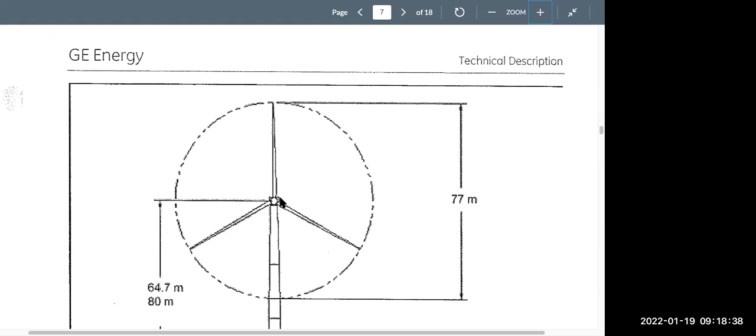And that just simply means the difference between the hub height and the diameter. All right, let's move on to the next section. We know that they're 80 meters, which is roughly 250, 240 feet tall, is how high up you are when you're sitting on top of this thing. And they get bigger, they can go to 100 meters. Usually around 100 meters is about as big as they go when they're on land.

The next section says the machine employs active yaw control, designed to steer the machine with respect to the wind, active pitch control, and generator power electronic converter systems from a speed variable drivetrain concept, designed to produce the nominal 60 hertz at 575 volts. Boy, that's a lot of stuff right there.

So what you want to do in your homework, on number 4, it says the wind turbine employs active yaw control. What's the difference between active and passive things? Does anybody know? We're talking about like a wind turbine. I'm trying to get you guys a chance to hop on in there and just shoot from the hip, it's okay. I believe it means... go ahead. With yaw control, active is like the turbine itself is turning its nacelle, and passive is the wind doing it. Yeah, active. Anybody else want to add to that?

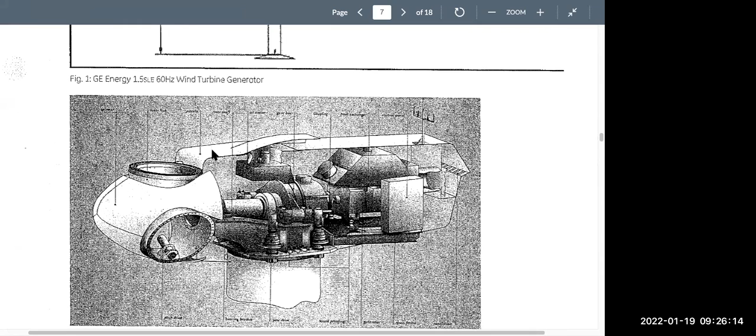This picture's terrible, we don't have any questions that come out of this picture, so we'll look at a better picture. Just kind of ignore that one there, can't read it anyway.

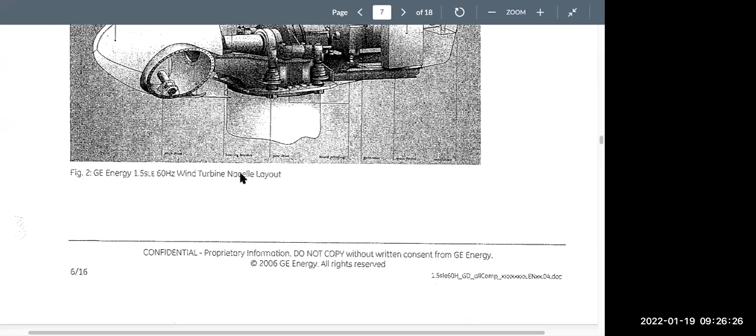Okay, so we know the rotor diameter is 77 meters. They give you a fancy number called a swept area, which we'll do some calculations on what that means later in the year.

The next question is, how many revolutions per minute is a rotor designed to spin? So what are they calling the rotor? Does anybody know? The rotor, yes, the middle part of it. It's basically the thing that when the blades spin, it spins the rotor that's in the middle of the wind turbine. Yes, you're right.

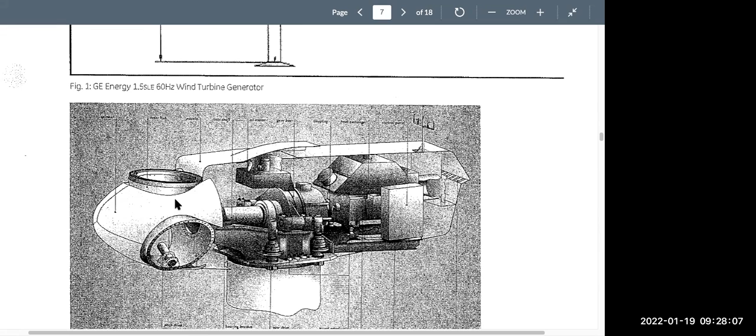So that's called the hub or rotor hub. The rotor is more or less the blades and the hub, like the propeller in an airplane and the nose cone, that type of thing. We call this the hub, and we call these the airfoils or blades. Hub plus blades together is the whole rotor. This whole thing right here is the nacelle. This part right here is also called the hub, and inside that hub we can see a little pitch motor.

So it's designed to operate between 10 to 20 RPMs per minute. When we look at these wind turbines, they're spinning and they look like they're going really slow, but they're going as fast as they're supposed to go. Those blades are moving depending on the speed of the wind, and the blade tips will be hitting around 150 miles an hour. So they're moving fast.

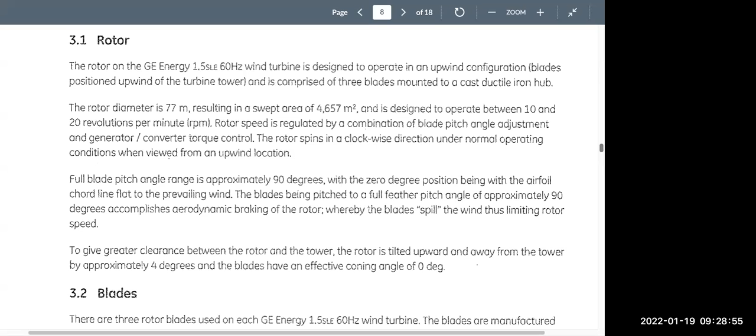The next question is, what is full blade pitch angle? 90 degrees, right? So what we need to answer on our blades, there's a couple terminologies. Full blade pitch angle is approximately 90 degrees. And then there's an angle called the 0 degree position for your blades. So think about a blade being able to spin in a circle. Where is 0? Where is 90?

The blade isn't going to necessarily spin in an entire circle, it's going to spin up to its limits. Each one of these blades will have a limit switch that allows it to spin roughly 90 degrees. So full blade pitch angle is 90. And 0 degrees is when the airfoil or blade is flat to the wind, or flat to the prevailing wind. Prevailing wind is just where the wind is coming from.

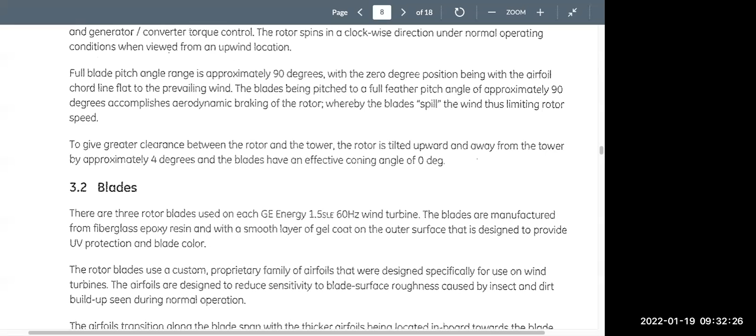All right, let's move down. What are the blades manufactured from? Fiberglass - yep, that's an easy answer. Fiberglass epoxy resin, and we've all seen that when we have one of those blades. It's actually a Vestas blade, but it has fiberglass embedded into balsa wood with an epoxy resin and a gel coat.

And what does the gel coat do? It says right there, blade color, UV protection. We're trying to keep the blade protected, and the gel coat tries to keep everything as aerodynamic as possible.

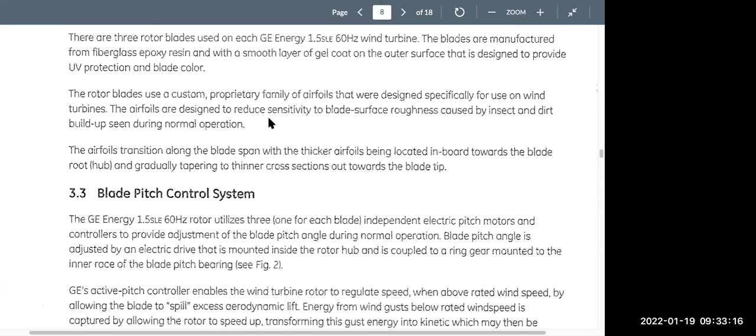All right, let's move on now to question 14. I'm on question 14. Does the GE 1.5 use hydraulic or electric pitch motors?

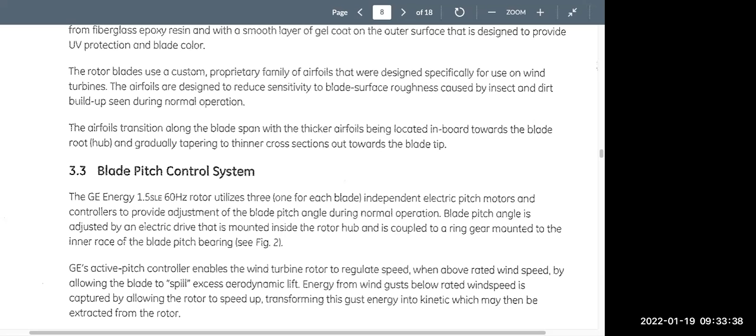So when we read this, we're trying to understand that. Electric, yep, electric. So we know that there is a motor that's going to spin the blade one direction or the other, and it's either going to be done by a hydraulic system or an electric system.

So now we know that the GEs are using electric. Vestas tends to use hydraulic. Have you been in a turbine that's using electric blade pitch, Edwin? No, everything is hydraulic, everything, they're just sticking with hydraulic. I wondered if they'd go back to it. I mean, hydraulic works, it's just messy. But it works. Yeah, that's why they have messy towers.

Let's move on to question number 15. So question number 15 is saying, what protection do the blades and wind turbines have if grid power goes down and the turbine loses power? How does the turbine protect itself? Like if your house loses the grid, all the power's out. What is inside this turbine that's going to keep it to where it can keep running? Does anybody know?

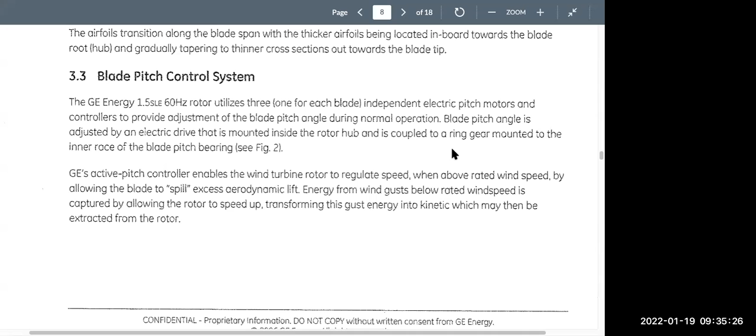Is it like, what's it called? Blade brake or something that cuts off the generator from the blades?

Yeah, well what they do is they use those batteries. So your answer there would be: each blade has a battery backup blade pitch system. So what that's going to do is use the batteries to feather the blades, or to turn the turbine out of the wind so it's not spinning anymore. We don't want the blades to catch the wind because the grid's down and we're not making any power. We want to shut our turbine down. So that's where that's at.

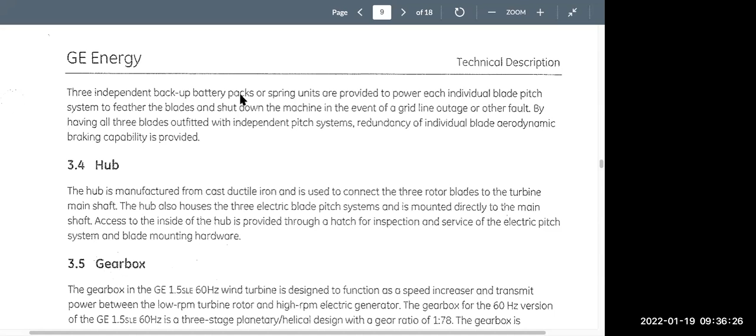Let's see, the next section is just talking about the hub. We already talked about the hub. The hub was that centerpiece of the wind turbine, the nose cone where all the blades are. That's where we have the pitch system and control systems. We'll learn more about that later. Each one of these areas will go into great detail, as much as I can go into anyway, throughout the year.

So the next section we're looking at is the gearbox in the GEs. It says the gearbox in the 1.5, 60 hertz wind turbine is designed to function as a speed increaser and transmit power between the low RPM rotor. Remember, the rotor and the blades are only going 10 to 20 RPMs, and the high RPM electric generator is running at a much faster speed, more like 1400 RPMs. But it's the gearbox that allows this to happen.

So the gearbox for this turbine, 60 hertz, is a 3-stage planetary helical design with a gear ratio of 1:78. So what you want to write down for question number 16 is: the GE 1.5 has a 3-stage planetary helical design gearbox with a ratio of 1:78.

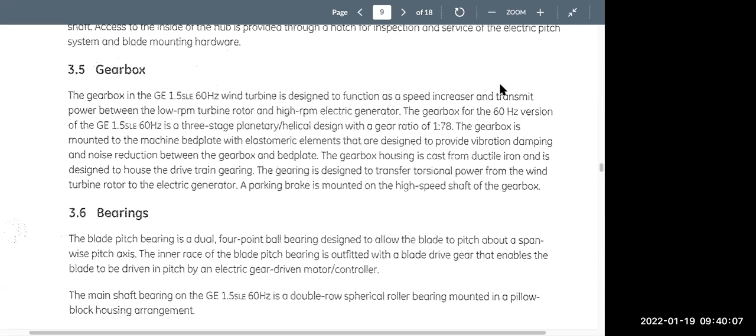Okay, so let's talk about bearings. Bearings are a really big, important part of wind turbines, because they are really taking on an enormous amount of axial and radial loading, meaning that the wind's pushing on these blades from different angles, and that's forcing your bearing to wear out, right?

So we're just going to write down - in the last class, our 101 class, we learned about different types of bearings, and we had a very small introduction. So if you're like, I don't know anything about bearings, don't worry about it. Just try to learn them as you go, because we're not going to focus heavily - we're just focusing at this point in time on what is in this GE.

So number 17 says the blade pitch bearing is a dual 4-point ball bearing. And the reason I point that out is because as a tech, you're going to have to learn the differences between different types of bearings - is it a roller bearing, is it a spherical double row, blah blah blah. There's several different types of bearings. You only need to know what kind of bearing is in the turbine you're working on, because if it comes time for you to work on it or grease it or replace it, that's where it comes into play. Okay, then we have a main shaft bearing.

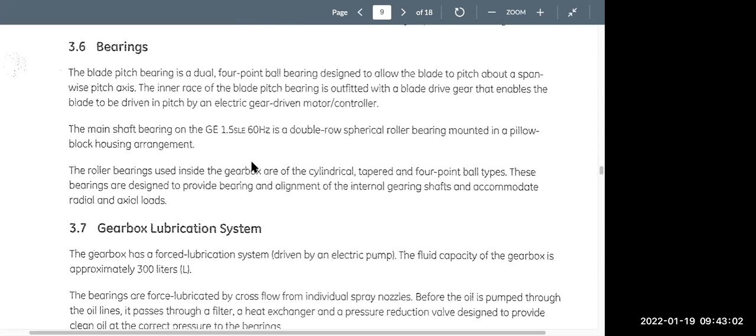The next section has us moving on to the gearbox. Let's learn a little bit more about the gearbox lubrication system. Some of you guys don't know the information, but it's good to know. You've had these questions before.

Let's back up here, hold on. We missed a question. We're on question number 19, the gearbox bearing, I'm sorry.

The gearbox uses roller bearings, and there's different ones. So these are 3 different types of bearings you're going to write down: cylindrical, tapered, and 4-point ball type. Do you have to remember all this stuff? No, don't freak out like, I can't remember all this stuff. No, what you're doing is just becoming familiar with what this stuff is so we can have a conversation about them, just like we already are. Tyron and I have had a couple conversations about the gearbox. He was telling me about a ring gear and a sun gear and things like that you've already learned. That shows you that you're learning, that shows you you're getting ready to go into the next step.

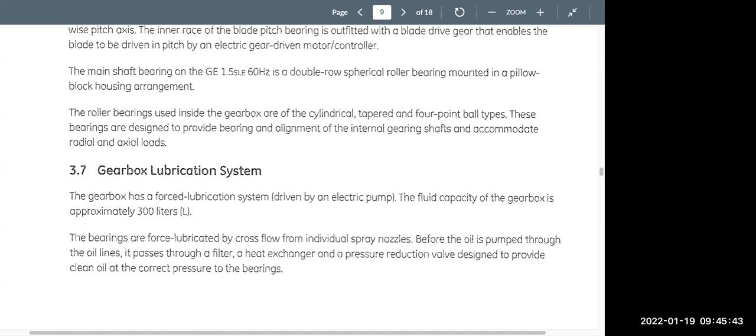Okay, it starts to get a little bit easier. We start to pick up a little speed here on some of these questions. A lot of the meat and potatoes of this brochure we kind of talked about already.

So let's talk about the lubrication system. The fluid capacity of the gearbox is 300 liters. That's how much oil we've got to put inside that, and that's oil that's sprayed inside this gearbox as it moves around. So we'll look at the drivetrain specifically in this class, and we'll see that there is a filter, there's a heat exchanger, there's different things within this gearbox that are trying to keep the temperatures regulated, because the viscosity of the oil matters.

Is it too thick? Is it too thin? And also, does it have metal shavings in the oil? Do we have a problem with our teeth? Those are some of the maintenance things that we'll be looking for.

Okay, so that would have been the answer to question number 20. So before the oil is pumped through the oil lines, it passes through a filter, a heat exchanger, and a pressure reduction valve, which helps clean the oil and correct the pressure.

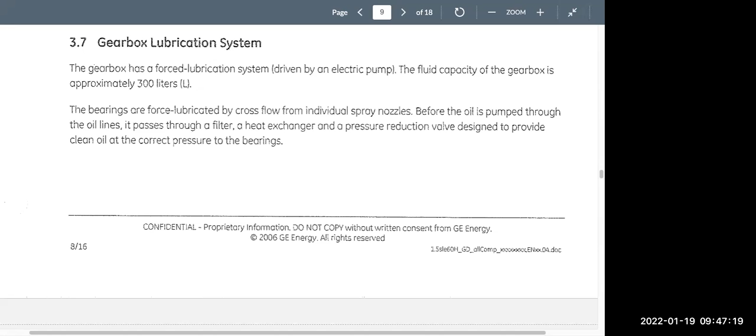At this point, we should be ready for section 3.8. So if you want to write that down in your notes, I'm going to be starting over with question number 1 under section 3.8.

So what acts as the main braking system? Blades. Yeah, the blades. We have other brakes that can be incorporated, but when we talk about the main braking system, the main braking system is going to be those active pitch blades that take it out of the wind. So number 2, braking under normal conditions is accomplished simply by feathering. So the answer to number 2 is feathering, feathering the blades out of the wind. That's normal braking.

Number 3, we should know that answer already. Can the blades be feathered out of the wind if the turbine loses power due to grid line power loss? There's a couple typos maybe in there. If so, explain how. Well, we discussed that already, right?

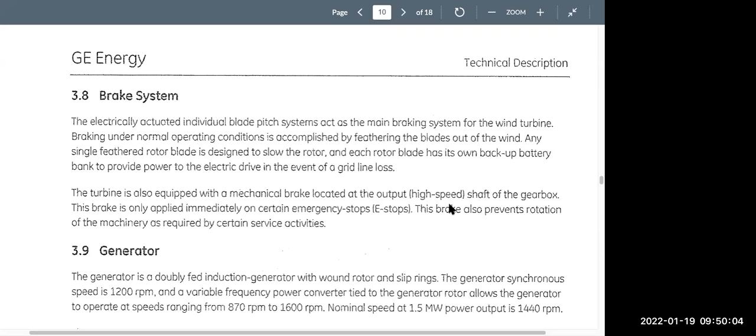We're around 9:49. The turbine is equipped with a mechanical brake located at the output, all right, so now we're moving on to the brake system. So we have the electric pitch system right here. When we look at the next section, the turbine is equipped with a mechanical brake located at the output or high-speed shaft. So that's a great big brake caliper, just like on your car. That's generally at the high-speed shaft of the gearbox. And we only incorporate this brake really when we have emergency situations and we're trying to stop the turbine from spinning so we can do maintenance.

Okay. The next section is about the generator. And I like to talk about the generator a little bit because it creates certain issues in your understanding about whether or how these turbines work. So let's first establish a couple things.

If I were to say synchronous, does anybody know what that means? The word synchronous means what? Happening at the same time. Correct. And asynchronous would be out of sync. Excuse me for a second. Happening at the same time. So this is telling us the generator is a doubly fed induction generator, or an asynchronous generator, is what it means.

This is going to be a little more difficult to understand. Don't expect to fully understand everything that I'm saying at this point. You might, and you're more than welcome to ask more questions about it. I'll tell you as much as I know.

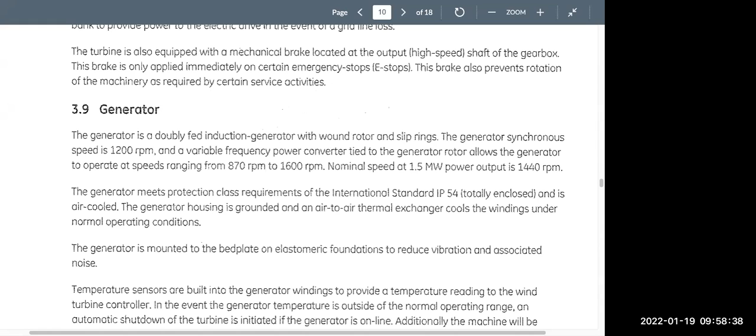Okay, so that should explain question 9. Should also explain question 10. Let's see.

All right, so right here, the generator housing is grounded and it has an air-to-air thermal exchanger. So number 11 is saying the generator is air cooled, and it has an air-to-air thermal exchanger. That's cooling both the generator windings, rotor stator, it's just keeping that generator cool. It has these great big fans above that generator that are blowing air through there, so they're air cooled.

Is the generator housing grounded? Yes, of course it is. It needs to be grounded. That's part of electrical. Okay.

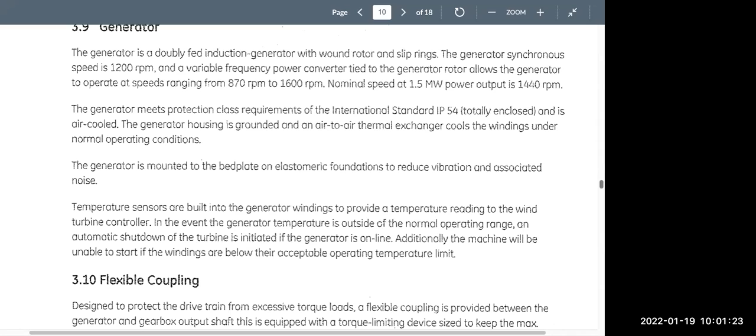All right, we are on question 15, and we're moving on to the flexible coupling. So the flexible coupling is in between the gearbox and the generator, and it's designed to keep the torque below 3 times the nominal drivetrain torque. So that's your simple answer there. The flexible coupling limits the torque below 3 times the nominal drivetrain torque.

What does a flexible coupling do? Does anyone know? It kind of says so in the name. Does it help the blade to kind of rotate with the wind, or keep it kind of flexible? I guess. Exactly, yeah. So you have the gearbox and the generator, two different things, one in the other.

In between the gearbox and the generator is a shaft. Now, that shaft is moving at 1400 RPMs, that thing's moving fast. We want it to be flexible enough that if it's out of control, it can actually tear itself apart, but it won't tear the entire wind turbine to pieces. It'll just destroy itself instead, and we'll have to put a new flexible coupling in. Or it helps in aiding with the vibrations that the turbine feels as we're moving from the blades to the gearbox to the generator through these different shafts. So flexible coupling is a thing that we need to know what that is.

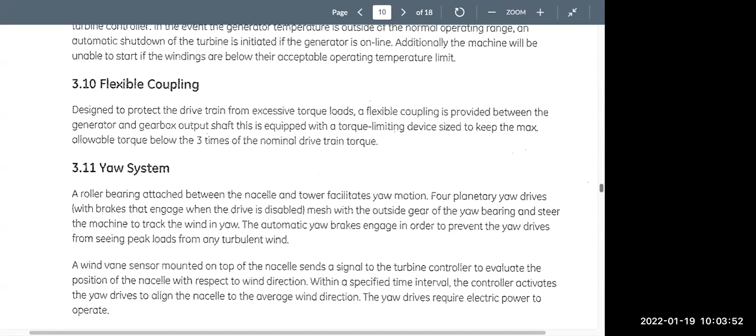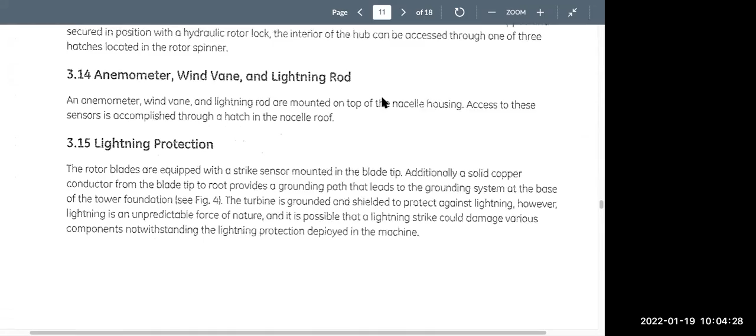All right, let's see here. We've got 17 more questions here and we're done. So we should be on section 3.11, yaw systems. Some of these questions get spread out a little bit further apart. We know that the yaw system is, let's see here. Yeah.

Okay, 3.11. So a roller bearing is attached between the nacelle and the tower to facilitate yaw motion. Now we're talking about the top of the tower, the blades, the generator, the nacelle. The whole top of the tower will rotate north, east, west, or south, 360 degrees, and there is another bearing there, and it's a roller bearing. So there's a roller bearing attached between the nacelle and the tower.

So what we're learning is we've got bearings, shafts, flexible couplings, these components that need maintenance. We need to know that they're there so that we're aware of the parts that are going to wear out. You know, if you're driving down the road and you hear your wheels squeaking, you can't just go kick it and hope it fixes itself. You got to understand that it's squeaking because there's a bearing on that wheel that's wearing out, and you're going to have to replace it before it completely wears out. That's called preventative maintenance.

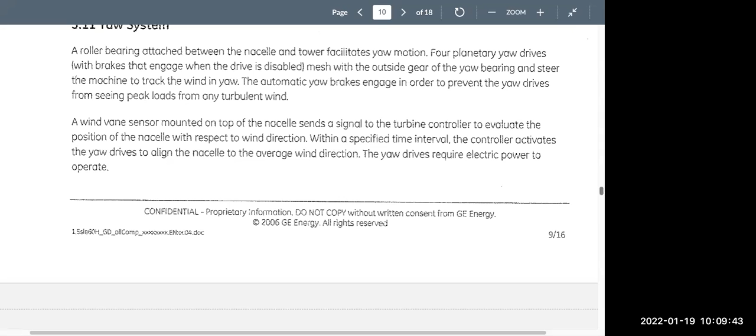Okay, let's see here. Next question, number 5: the controller activates the yaw drives. So we have the wind vane going to the computer. The computer then tells the yaw drives to turn so many degrees this way to face the wind. And what we're looking for is the average wind direction. We're not going to be chasing the wind constantly, but we're going to be looking for the average wind direction.

All right, number 6. We already answered that one a little earlier, but the yaw drives require electric power to operate. So the yaw drives are electric motors.

All right, we're almost there for today. Number 7: what we're looking at is a cable twist switch sensor. Twist switch sensors are a little more confusing to understand, and I wouldn't expect anybody to know anything about those. But what we have is the wind turbine is going to rotate so many times before it can't spin anymore. It will tangle up its wires because it's still connected to wires. So what we have is a twist switch. Number 7 says a cable twist switch is mounted to provide a record of your nacelle position and how many times it's twisted. So a cable twist sensor simply means if we've gone 360 degrees once, then twice, it's not going to let us go a full 360 degrees again. It only will let you go 900 degrees, and then it's going to spin the turbine back out and reset. Usually that just happens over time as the turbine's chasing the wind, but it's a safety feature built in.

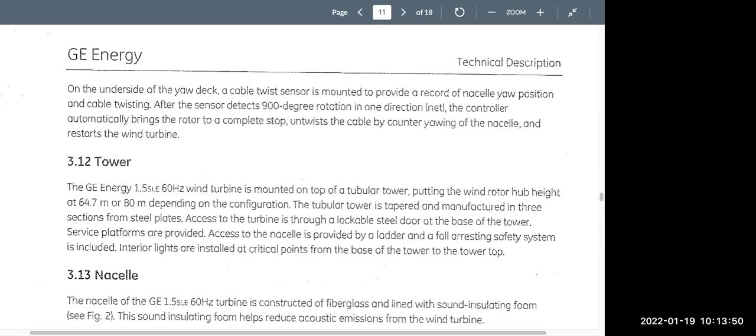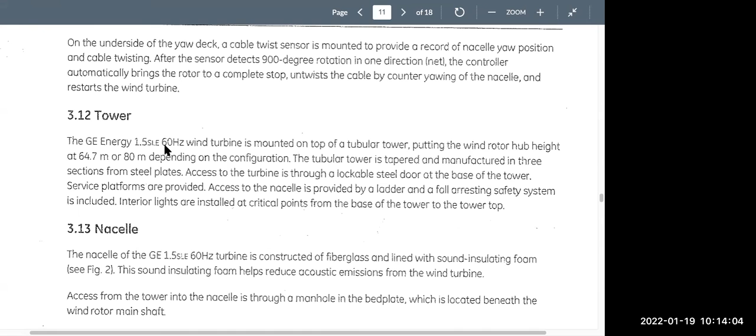Number 10 is talking about the tower. So we're just going to make sure we understand what the rotor hub height is. It's 64 or 80 meters. That's how tall it is.

We know that the tower is a tubular tower and they are tapered, bigger at the bottom. So if you're seeing them haul towers down the road, you'll notice that some are tapered, smaller at the top and bigger at the bottom. These are made from steel plates. So number 11, the tower is tapered and manufactured in 3 sections. The bigger the tower is, the more sections it's going to have, so 3 sections versus 5 sections. The really tall, big ones we were looking at earlier might be more than that.

Number 12, it does have interior lights. So number 12 is just interior lights are installed inside the tower. When you're climbing to the top, those are important. Why? You're like, well yeah, it's got lights. Well, you've got to work on those lights too. Sometimes you've got to change the light bulbs, sometimes you've got to replace the light. They're on the side of the tower. You're going to have to be hanging off of a ladder in the middle of the tower working on that, depending on where the light is. So you can't ignore those.

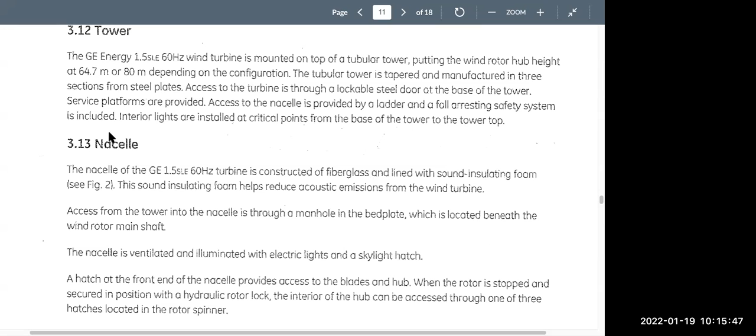Next section, 3.13, the nacelle. So the nacelle is constructed of fiberglass and lined with sound insulating foam. So number 13 is simply the nacelle is constructed of fiberglass. That's what the white part of the turbine is, fiberglass, and they have insulating foam. Sound insulating foam is to help keep them quiet because we don't want them to make any noise or bother the neighbors or bother anybody around them.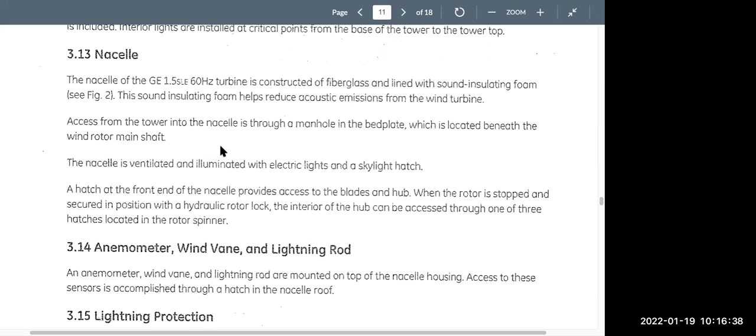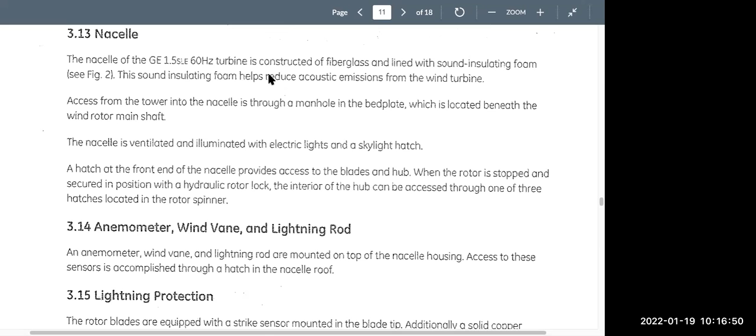Let's see here, let's move on down to the next question. So let's see here. Getting ahead of myself a little bit. We're almost done, I think you guys had probably about enough.

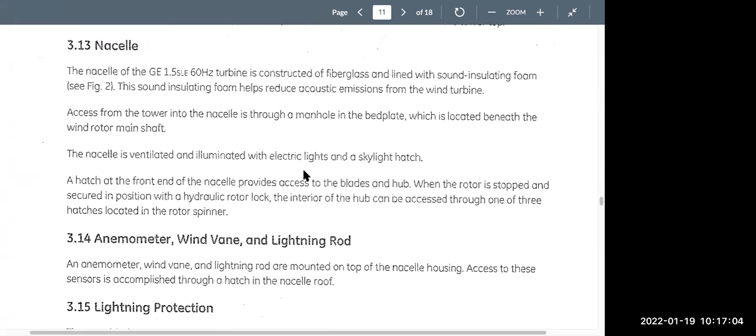So number 13 is, and we've answered this question already earlier, but we're all the way down here. When the rotor is stopped and secured in position with a hydraulic rotor lock, the interior of the hub can be accessed through one of the 3 hatches located in the hub or the rotor spinner. We had talked earlier, Edwin said when he has to do that, he would go through three locks, and before he would pin it out with 3 pins. And we've got to look at that in detail.

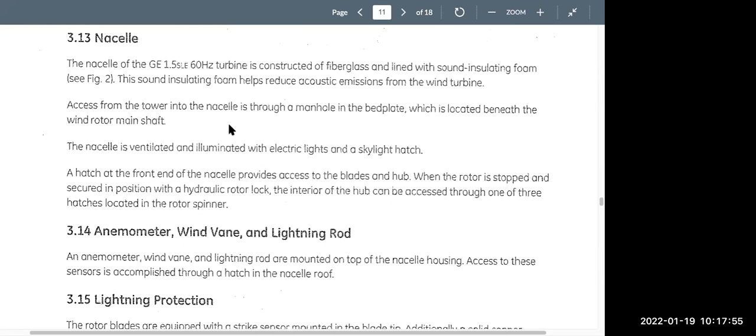Okay, next question, number 14, only a couple more left, and then you'll be able to take a break.

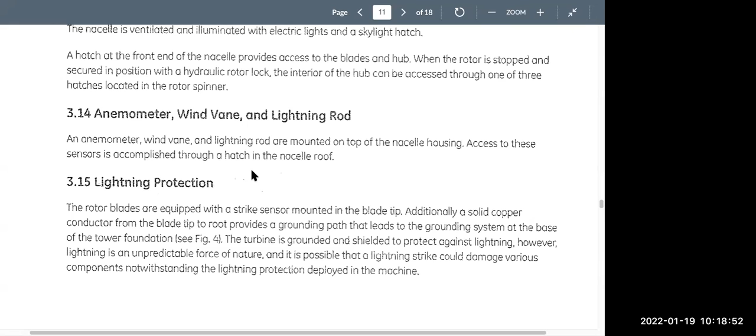An anemometer, wind vane, and lightning rod are mounted on top of the nacelle housing. When you look at the top of these nacelles, you'll see these things that look like a cross or a lightning rod, which is exactly what they are. We'll look at those when we see them in pictures, but there is a lightning rod up there. It is important because lightning protection is a huge part of wind energy. They do get struck by lightning more than we would like them to be struck. And if they do get struck, we're trying our best to make sure that the lightning goes to ground and not through our wind turbine electronic components, or as little as possible.

So number 15 says the rotor blades are equipped with a strike sensor that's mounted in the tip of the blade. So when lightning strikes that blade, there is a wire - I wouldn't say little, but it's about the size of, I don't know, your thumb. It's a cable that runs down that blade, down into the grounding system of the tower. It's there to try to send the lightning down the tower through the grounded system, as we already discussed.

So to answer number 16, the system described in question 15 does what? It provides a grounding path that leads to grounding systems at the base of the tower. Simple as that.

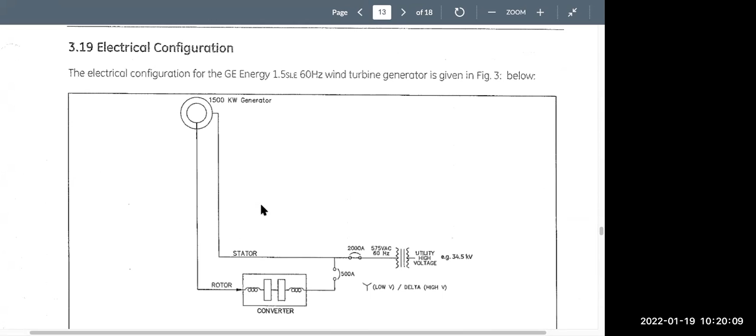And the last question we have, we're not going to go into any more stuff. That's where we're going to stop. I'm going to give this for your homework anyway. Question number 17 is your last question. I think that's enough, but I feel like let's just answer number 17.

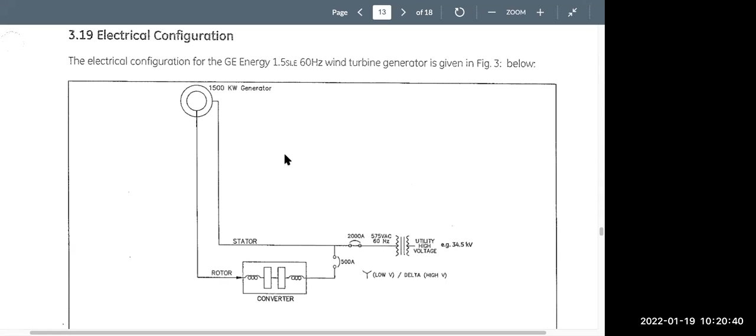Number 17 says, even with a grounded system, can lightning damage the turbine? And that's a very easy answer. It should be yes, because we know lightning is an unpredictable force and it can cause damage to a variety of components, even with a lightning protection system.

And that's one of the reasons why we have to get out of the tower. So, I'm a little hesitant to talk about this, but I'm going to give it a try.

If you can see this picture, I want to try to explain to you in a very basic sense how this doubly fed induction generator works. You may not catch it all, but what we have is a transformer right here.

This is at the bottom of the tower. That transformer is 34,500 volts. That's the grid. The transformer takes that power from the grid and steps it down to 575 volts. Still high voltage, but now we're at 2000 amps. This is a 2000 amp wind turbine. That's a lot of amps.

And what happens is the grid comes up through the stator, and this is our generator. There's an invisible magnetic field that is spinning around this generator. So synchronous speed would mean that this thing's spinning at like 1200 RPMs. If you could see it, you can't, but it's going around.

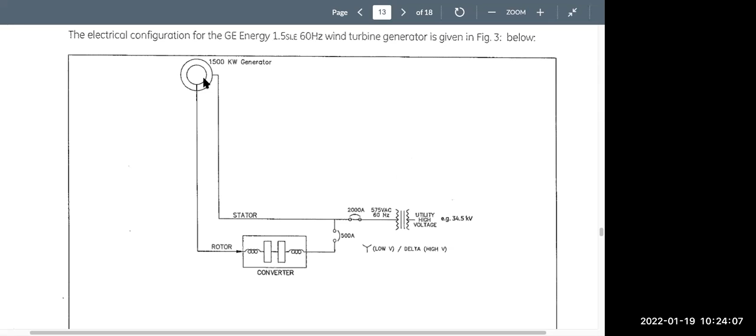So again, we're getting way ahead of ourselves. Don't feel like you don't understand any of this. We'll talk about the generator in greater detail, and we'll talk about how the rotor works in greater detail down the line. But for today, that's all we're going to do.

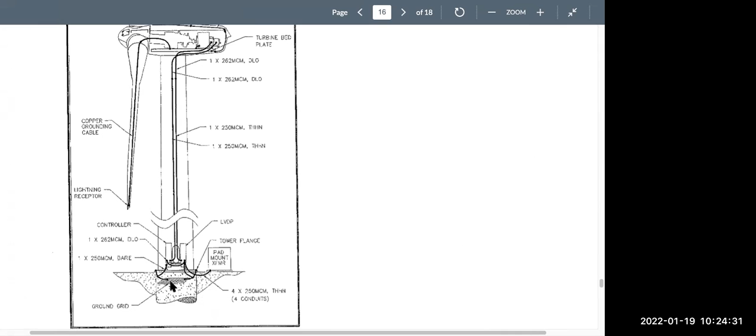So there's a little bit more information in here. You don't have to read all of it. You've got some pictures in here. You can see how the lightning protection system works. So if lightning were to strike here, it'll come down and go down the tower and into the ground. We don't want it going through our components up here.

But as long as you've completed your homework, which was basically just being with me today in a little study group like we did, answering some questions, showing me that you've taken the time yourself to fill in the information so that you've processed some of those terminologies and concepts in your head, you may not understand them all completely, but now you're getting a better idea of how a wind turbine works.

What you would do then is once you finish this homework here, and I can click over to student view, you would come to this page where it says start assignment. You'd click on that and upload your file. So as soon as you're done with your homework, you just drop your file in there, or drop a picture or take a picture if you can. And you'll be done with this first assignment.

Okay, I know that's not fun going through some of that stuff, and it's hard to understand when you don't have a lot of pictures, but we don't want to do too much on our first day. I just want to get you familiar with some of the terminologies. And I'm going to leave student view. Let's go back to modules.

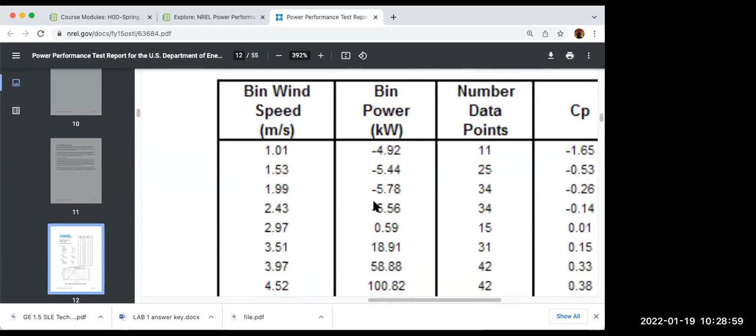That does beg the question: do these wind turbines run at full capacity all the time? The answer is no. I wish they did, but they don't. They run as much as the wind blows, and it depends on who you ask and where the wind farm is. Some people say they run at about 50% on average of what they can do, or 30 to 40%. Then you have those windy days where they're just putting out a lot of power.

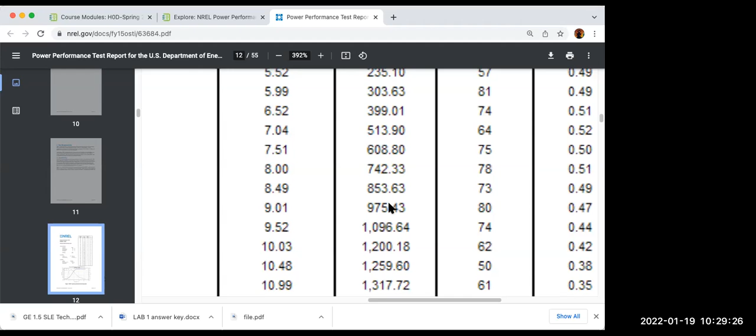You can also look and see the cut-in wind speed is 3.5. Cut-out wind speed means the wind's too fast. And then you have your rated wind speed, which is your nominal speed—that's going to be our 1400, 1440 RPMs. We want to be around 14.5 meters per second.

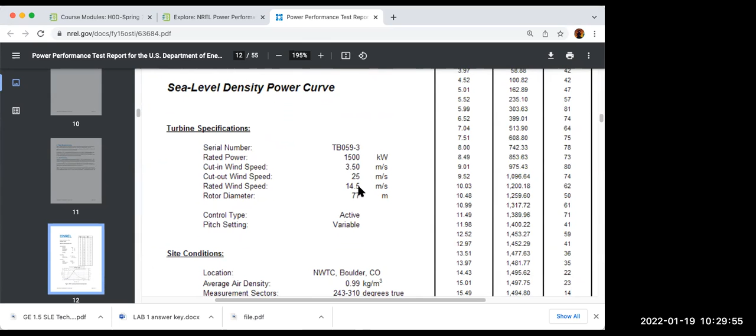This has basically the power curve. You can see down here as the wind speed increases dramatically, we start to see the power go up.

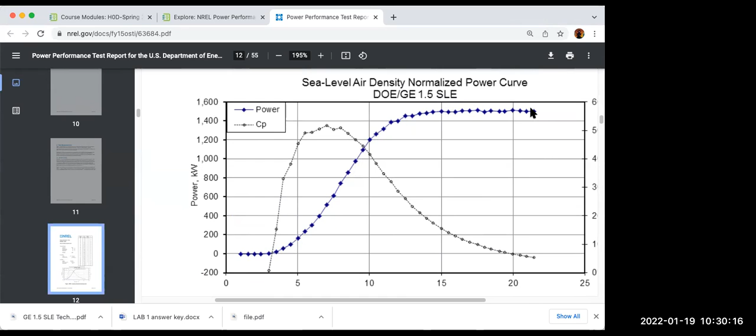I just wanted you to see that there is this document in here if you want to learn a little bit more. It's 55 pages long—it's a full report on this turbine. I wouldn't expect you to read it at all, just it's there if you want to look a little deeper into how these turbines work and the rating.

So for today, that is all that I really have. Oh, I did want to point out this EIA map.

Some of you guys that don't know about EIA maps, you just click on EIA maps and that can take you to this website. Then you can click here and zoom in. You can see all of the power plants. We'll remove the layers and click on wind, and there you can see where all the wind farms are—not all of them, but most of them throughout the United States. You can zoom in even a little closer.

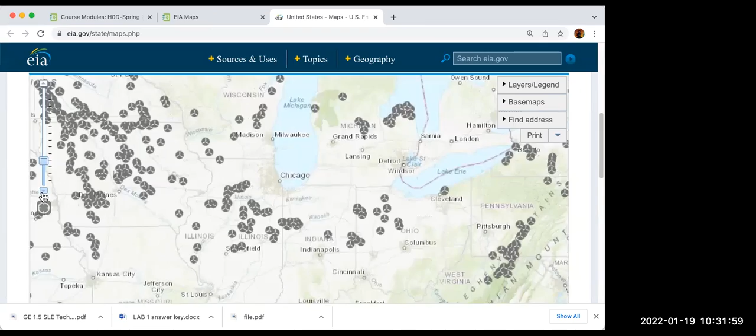For our area, if you want to stay close to Indiana, you have all these wind farms here, plus wind farms in Illinois, and even some over in Ohio. So you can stay pretty close to Indiana if you want. If not, that's okay, because they've got wind farms all over the United States, and they're continuing to build them.